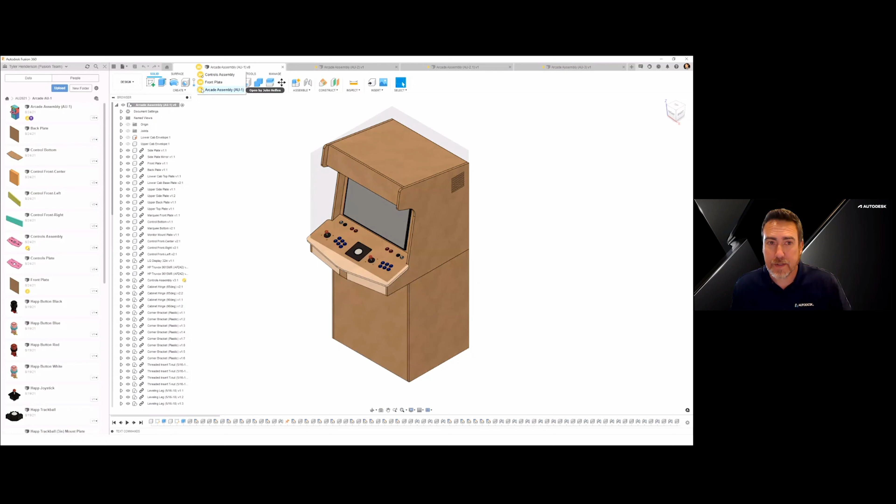So here I have an arcade assembly open. If we look up here in the document tab, I see John Helfen's avatar — the yellow avatar with his initials up here. If I mouse over this, I get a drop down that tells me exactly what he's working on. I see he has the controls assembly open, the front plate open, and the whole assembly open. As I mouse over each one, I can see them highlighted in the canvas, and if I click one, it's more highlighted and actually selected, so I can see closely where he's working in this assembly.

The other thing I see on this avatar on the controls assembly is a white dot. That white dot indicates that he has that design reserved, so it tells me he's actually editing that design. That's a good indication that I don't really want to be working in that same design or try to save anything — it's not going to let me save anything until he's actually done editing.

If we look over here in the browser, we show the avatars on anything that another team member has reserved. As I pointed out, John has the controls assembly reserved, that's why I see his avatar in the browser on that component. Reservation only happens on external components — John will talk about that in a minute — but I also wanted to point out the avatars appear in the data panel over here. I see John's avatar on the front plate, the controls assembly, and the arcade assembly.

So anybody else on the team can go open up Fusion, go to the data panel, and see who's working on what. They don't necessarily have to be in the same assembly or open up a design to see who's in there — they can just go to the data panel. You'll also be able to go look at that in Fusion Team.

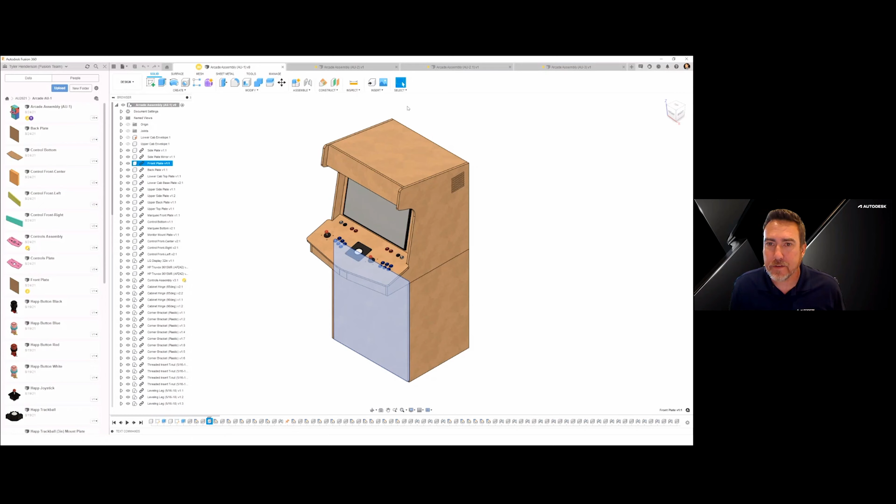Thanks, Tyler. Now that you've heard what the icons look like, I wanted to show what it looks like from my side. Just like you saw from his side at the title bar or in the document tab, I can see that he has this assembly open. And just like he saw, I can see that I have this controls assembly open as well. I've got it open in a different window that I'm editing, and this is the assembly I'm viewing. I also see the same information in the data panel.

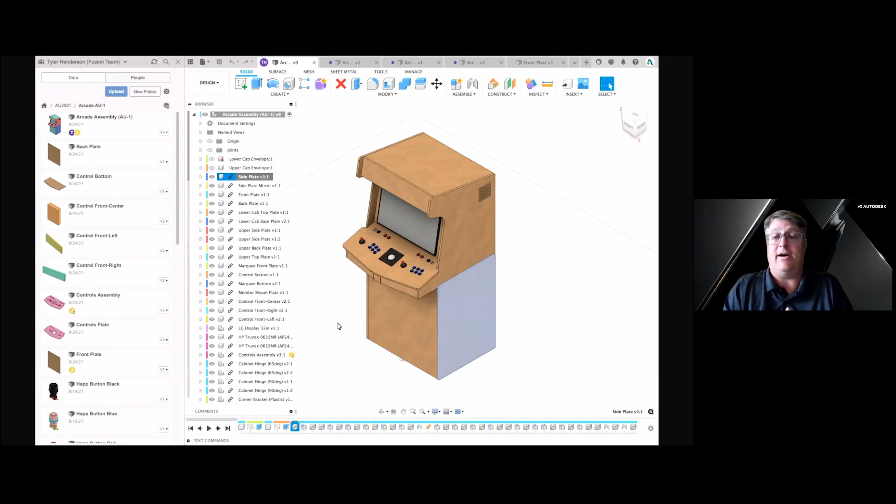As Tyler mentioned, it's important to know that a lot of the collaboration functionality we're talking about is specific to distributed designs or external files. In this assembly, we've chosen to use some internal and some external components. This is something you'll need to discuss as you prepare for team-driven collaboration, deciding who's going to be working on what. Based on that, you'll decide whether components need to be internal or external. If you don't know, it's often better to start with an external file, since it's easy to make it internal. On any external file, right click and select break link and it will make it internal. If you've got an internal file and need to get it out of the assembly, you can use the derive functionality. Let's take a look at where those show up here.

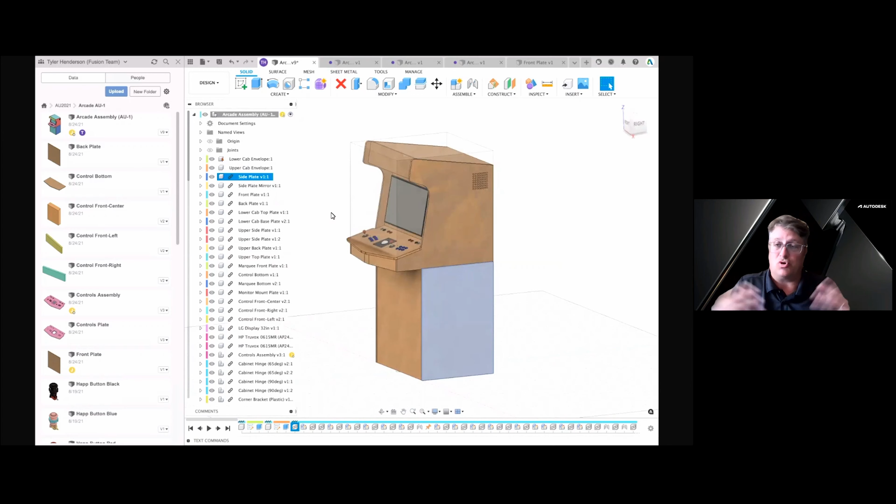You see the external files here in the browser, represented by the link icon. Just above that, we have a couple of internal components that we've created. These are really just design tools, envelopes that we're using to control the size and shape of the assembly. Nobody really needs to collaborate on those, so we kept those internal just for speed and efficiency.

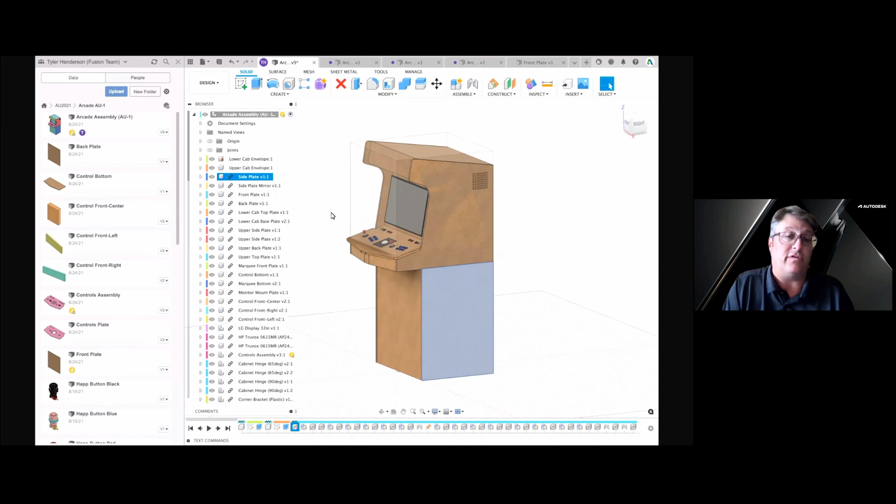But all of the other components we know we might use in other assemblies, and we may separate and have specific team members detailing them out, so we chose to make those external. It's important to know that you may have situations where you create an external file to distribute information, but even within that external file use internal components for flexibility in different scenarios. So it's important to know the difference and consider them at the beginning of a design process.

We mentioned edit in place earlier relative to external components. One of the benefits of external components is the ability to edit them in the context of the assembly. Of course, you can do that with internal components too, but external components provide the ability to collaborate in an assembly. So when you have external components in an assembly, you can edit them in the context of the assembly without having to open them in their own tab.

To edit in place, you simply right click on the component you want to edit and choose edit in place from the menu, or hover over one of the components and use the fly-out pencil button that appears and click on it. This puts you into edit in place mode, indicated by a blue border around the screen, and a toolbar appears at the top of the canvas telling you that you're in edit in place.

Now you have two options when you go into edit in place: associative or non-associative. Non-associative is basically like opening up that component in its own tab and doing the edit, except you can still see all the surrounding components from the assembly. You just can't reference any of them, select them for references, or anything like that. You're just focused on editing that one component.

If you do associative edit in place, that lets you select other geometry in the assembly, other components, sketches, faces, anything in that assembly that's in other components. You can select them for referencing, so you could do sketches in the component you're editing and project geometry from other components. When you do that, it creates an associative reference, and we capture those references in assembly contexts, which we'll discuss in the next section.

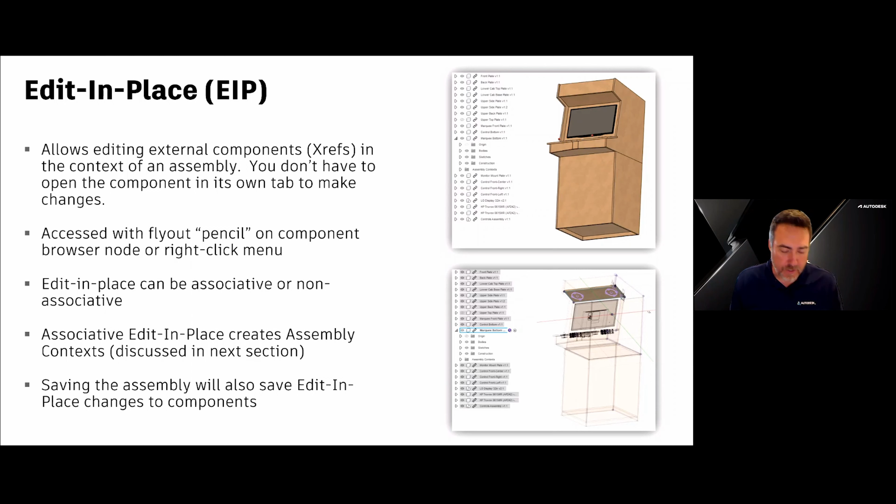So we're going to switch back over to Fusion 360 and show what edit in place looks like there. All right, so I have another version of the arcade assembly here, and what I want to do is put some speaker holes in this bottom marquee.

So you can see I have the speakers already in this assembly. They're external components in here, and they've been inserted. And I actually want to use the geometry from those speakers to create the holes in that bottom plate.

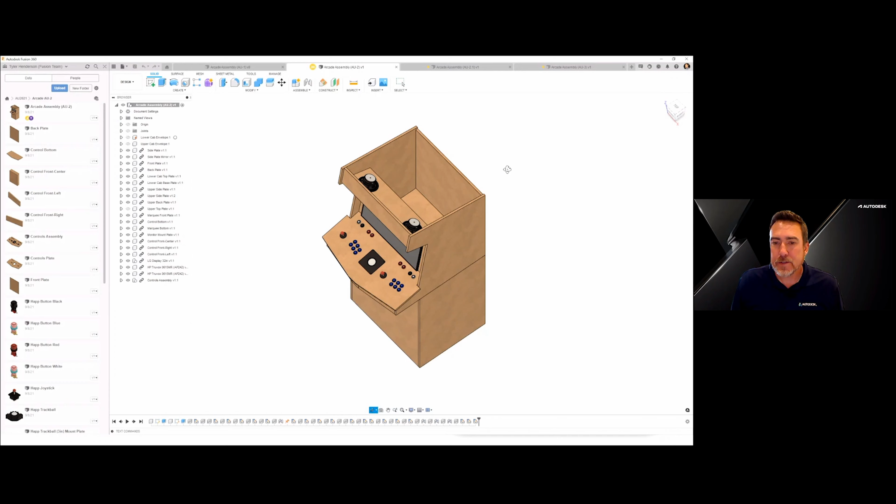So I'm going to go ahead and start edit in place on that bottom marquee. Just click the pencil button here. It puts me into edit in place mode. It tells me what component I'm editing. And when I start creating references, it'll actually create a context. So you'll see that happen here in a second.

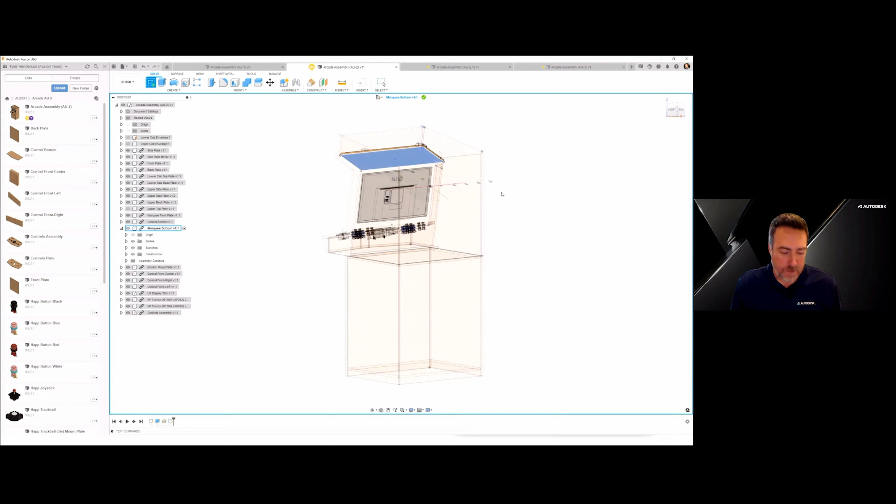So I'm just going to do a sketch, and then I'm going to project geometry from these speakers. I want to just grab the outside of these speakers so I can get the proper size hole. This is a nice way to do this because I don't have to guess the hole size or measure it and draw it manually. I just project it from those speakers, and then I have the information I need.

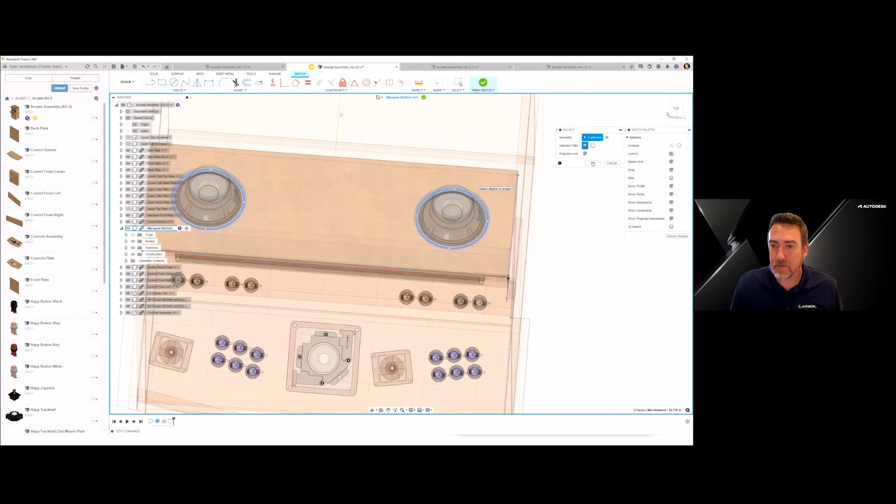Now, one of the cool things about this, as we talked about, is collaboration. So while I'm actually working on this bottom marquee plate, John can be working on another part of the assembly and doing edit in place on components there. So we're going to switch back over to John's computer and see what he's doing.

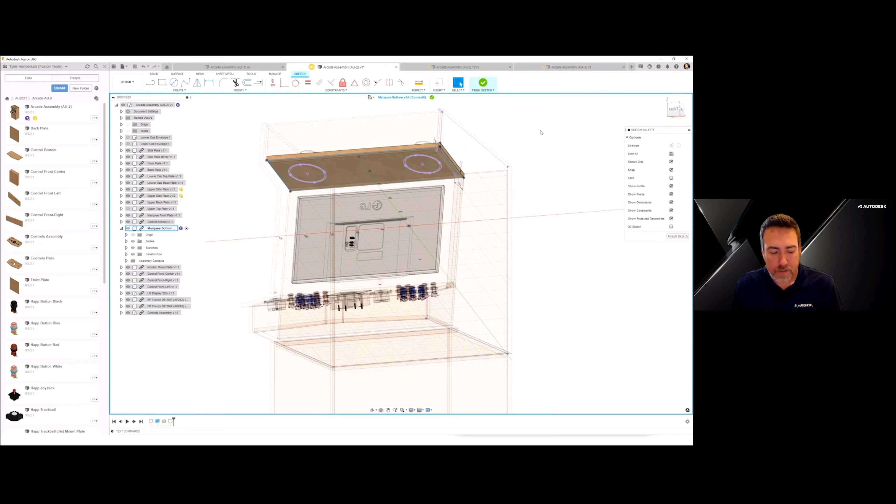All right, thanks, Tyler. As Tyler mentioned, just because he was editing the assembly doesn't mean that I needed to stop. This is often in traditional design environments where the stopping happens. This is where we might run into a situation where I have changes that I've made to something, and Tyler has made changes as well. Often those are the cases where it's whoever saves last wins. If I save my work and then Tyler saves, he stomps on me, and the reverse is true as well. And that's not the case here.

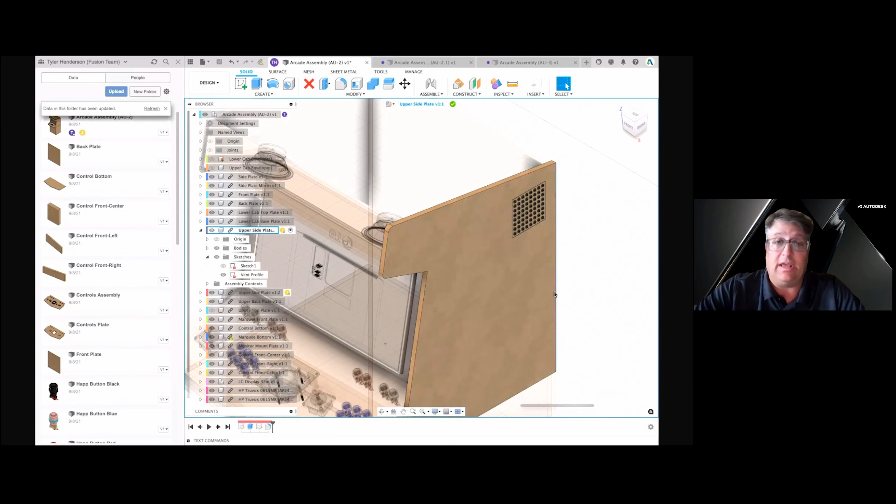As Tyler started editing the assembly, I saw that the collaboration icons let me know that he was changing things, or that he had things open, and that he was changing them actively. And that didn't prevent me from opening the assembly, getting into this design and doing some work. While Tyler was working on getting those contexts set up for reference on adding the speakers, I was adding some fillets. I was using my basic modeling commands to do general updates.

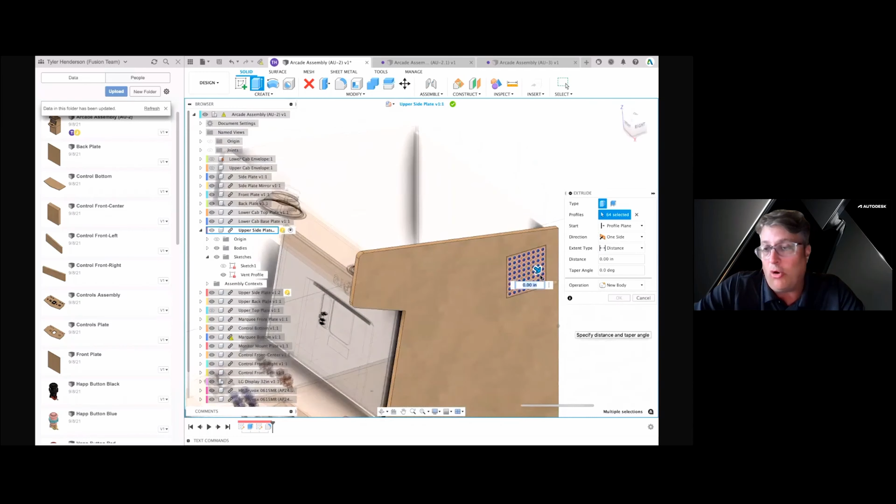Now, what's important here is because Tyler was working on the assembly, I'm making what are known as non-associative edits. This is really like me opening the file in its own window and making edits and changing it. Once I come out of this and I save this, Tyler would be notified that a change happened, and he would be able to bring that information into his assembly.

But what's important is when I came in here, I knew Tyler was in the assembly. And if I just saved this and moved on, it wouldn't be any different than what you would be used to in a traditional environment. But what's important here is that Tyler has clearly made changes.

You notice when I came out of edit in place, I have a new icon here in the root of the browser and here on the top toolbar as well. That's telling me that Tyler's made changes. And I knew that going in because I had seen his reservation on the feature. So I knew to expect changes coming from him. And that's what we're going to do here.

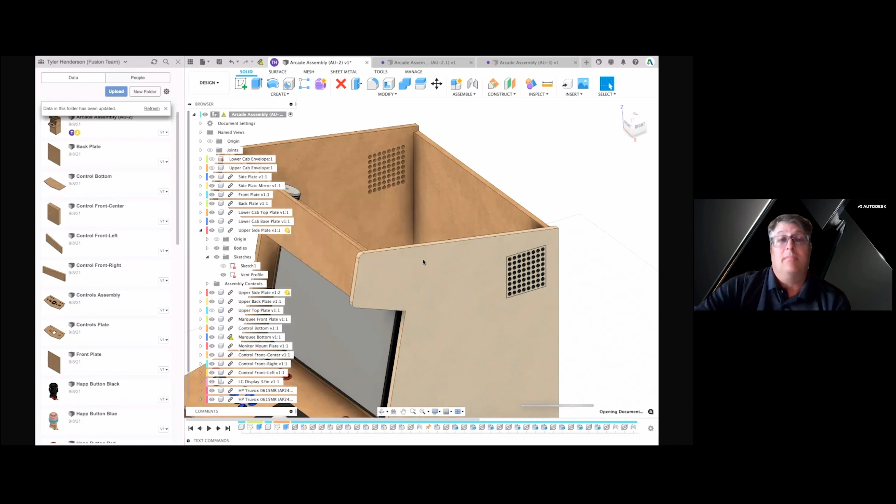So all I have to do to get Tyler's information is I can go ahead and say get latest. By doing that, Fusion sends the changes that Tyler has made to me while I have changes in memory. What's important is now I can see the changes that Tyler has made, and I can also see the changes I've made. I've rounded these corners, I've enabled some venting, and now I can see both the changes for all of the assembly components that we need.

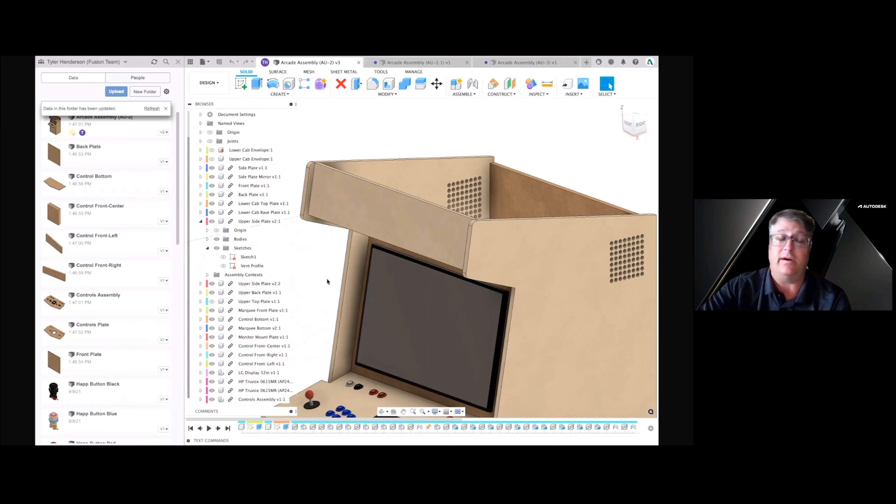And now I have the ability to save those changes. By doing that, I'm capturing both the assembly that contains Tyler's changes and the upper side plate that contains mine. So essentially, we avoid the need to stomp on each other, or eliminate the chance that we do that, and we have an opportunity to have all the correct information.

All right, thanks, John. So now we're going to take a look at assembly context. John's going to introduce assembly context that gets created when you do associative edit in place.

Thanks, Tyler. As Tyler mentioned in the previous section when we were working on edit in place, you saw Tyler creating context. The difference to how he's doing it and what you'll see as we move forward was he was just doing standard modeling operations. What's important here is context make an associative connection between an assembly and an external file during the edit in place process.

And it's important because in the assembly, when we make these references, you have the ability to distribute information—positions of things, geometry, construction information, references from the assembly into the external file. The reason for that is most people don't want to be in the main assembly. You want to have this distribution of information, but focus on the things that are important to you, and context provides that capability.

What this does is when Tyler was projecting the information from speakers in the assembly, those contexts were being created automatically. Then when he opens that assembly or that component on its own in its own window, those contexts can be activated, and he has access to what he needs from the assembly without having to have the entire assembly open. The nice thing is these links are associative.

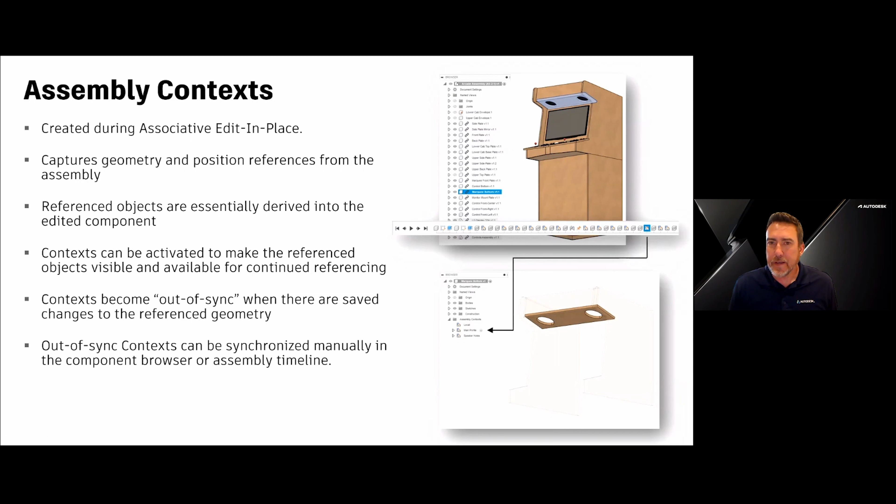As you can see, I have a version of the assembly open here that has the holes in the marquee bottom plate. I created those holes using edit in place, and when I did that, it created an assembly context. Over here in the browser, I expanded the marquee bottom, and I show the assembly context here—here's the speaker holes context that was created when I projected the geometry from those speakers. If I click on that, down here in the assembly timeline we have a representation of that context as well.

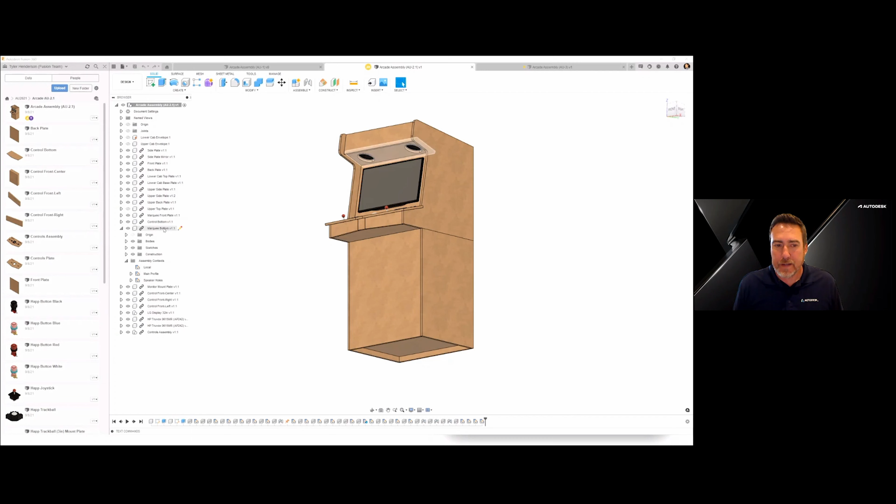So I want to show you what this looks like when I open up this component in its own tab. Here's that marquee bottom in its own tab, and again I have the assembly context, the same ones that you saw in the assembly. I can go ahead and activate one of those.

When I do that, you actually see the geometry of the components that I projected—it's actually projecting the bodies that I selected. If I expand this a bit further, you can see those two bodies here. So it doesn't bring in the entire component; it just pulls in the bodies of the entities that I projected.

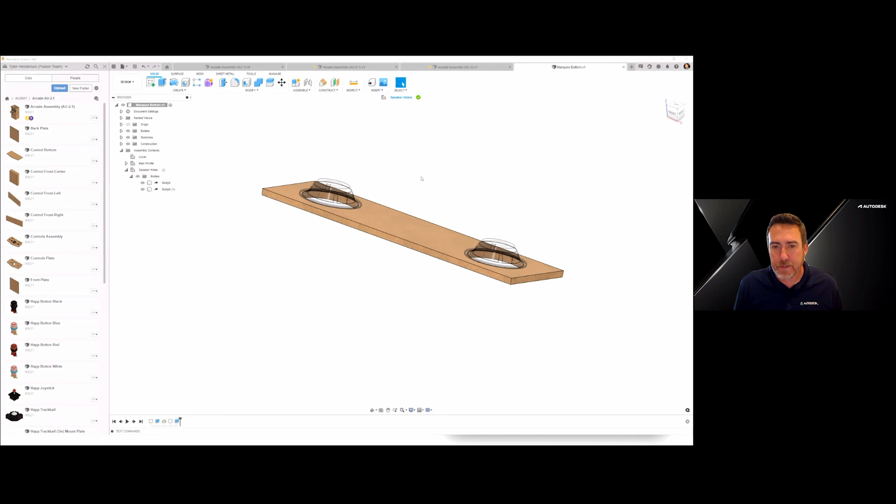Now here's the really cool thing: I can continue using this context to make more edits, and I need to put some mounting holes in this plate for these speakers. So I'm going to go ahead and do another sketch, and I'm going to project those holes.

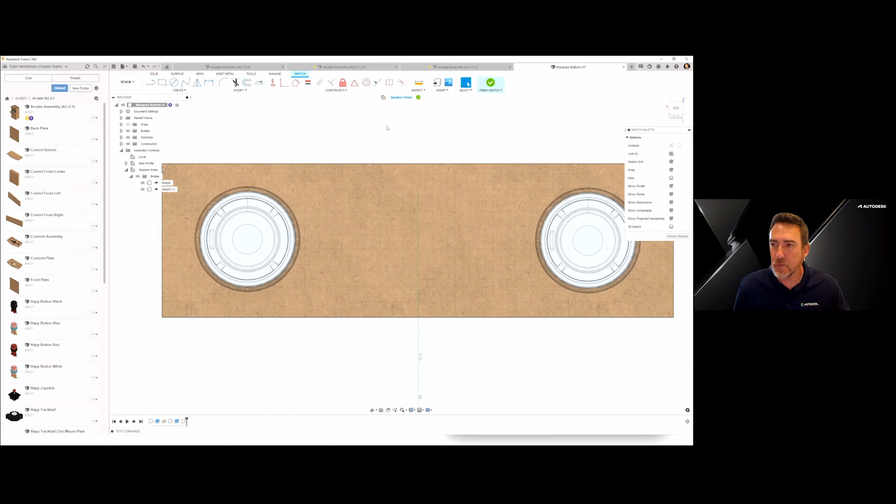Now, while I'm doing that, John can still be working in the assembly. So even though I've got this part open in its own tab with those references from the assembly, John can be working in the assembly and making other changes. We're going to switch over to John's screen and see what he sees.

Thanks, Tyler. As Tyler said, he's going to continue on with his work, just as you saw him moving about his business, and I'm going to do the same. While he's editing, as you can see here in the browser, I can see that he's editing the marquee bottom. I also know he's only editing it on its own because he's not in this assembly, and it doesn't have any reservations there. So that's where we want to be.

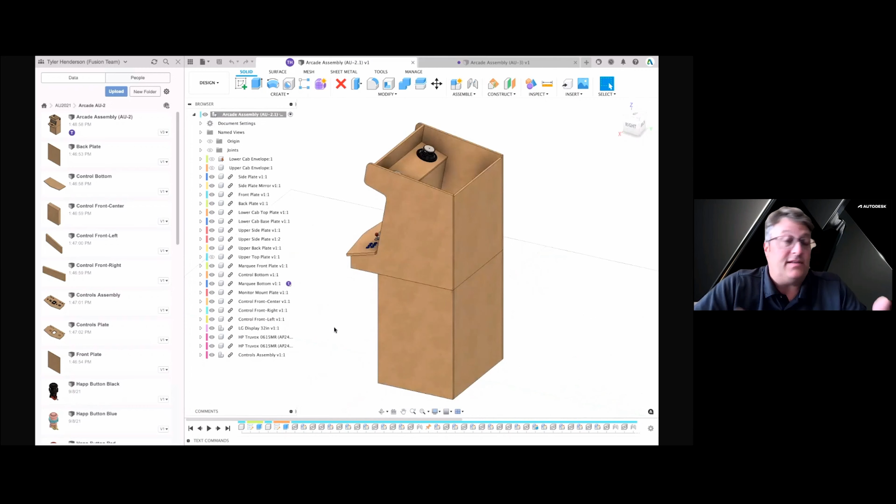My job was to work on some of the stuff on the side panel. I know we're going to be making some changes to this marquee as well—we're going to add some new lighting capabilities in it. So what I'm going to do is from the assembly side, I have the ability to make those changes here.

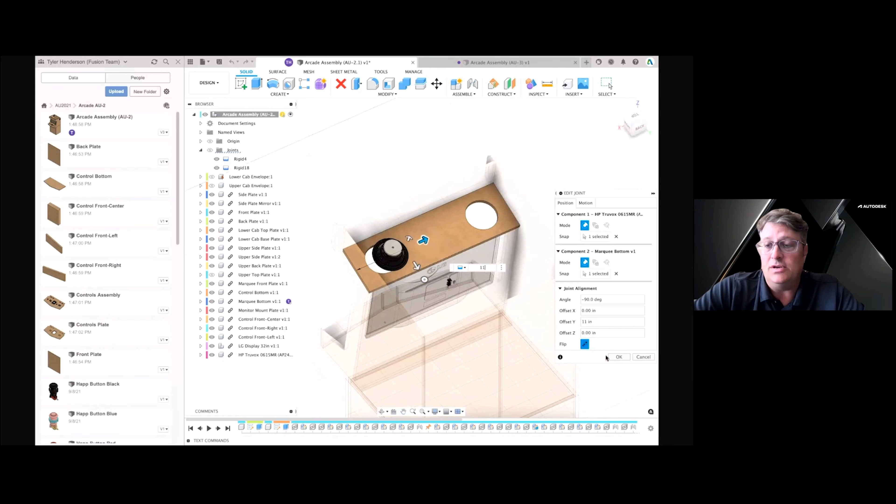For example, I can say these speakers need to be adjusted—maybe they need to be moved in just a hair on each side to make some room for some new lights. I can be editing those positions in the assembly, and Tyler is continuing about his business, working in his daily work, isolated on his own, not in this assembly. But he still has access to everything that's important to him.

And those are ways that you could bring that information in. Tyler's going to see the same. Once I save these changes, he will end up getting a notification that the context has gone out of date, and we can trade information back and forth. But really, my working in the assembly wasn't interrupting him.

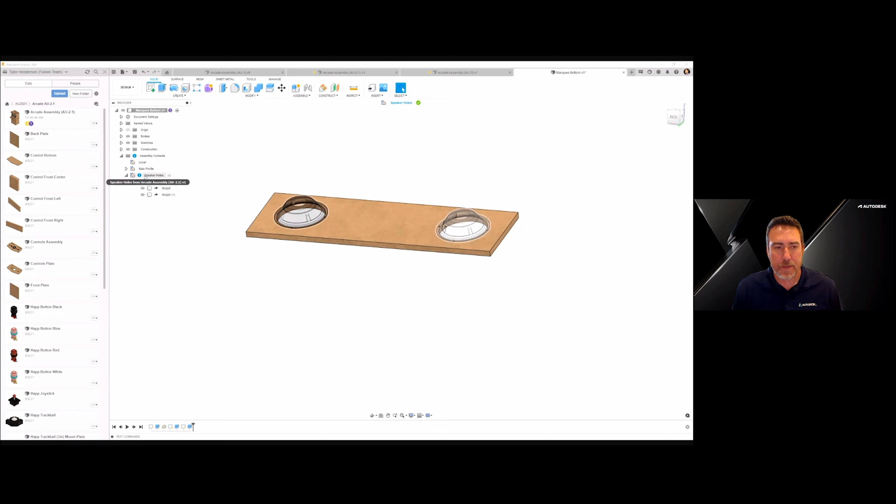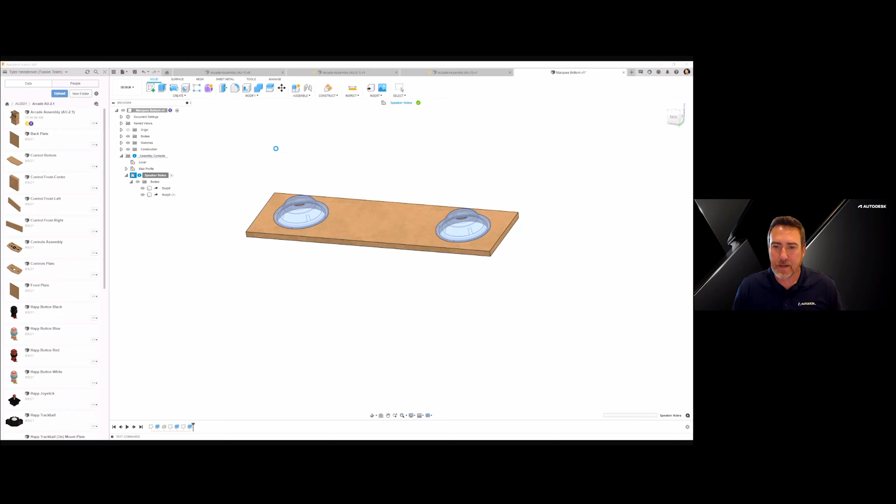Thanks, John. Let's take a look at what I have on my screen. As you can see, the speaker holes context I have here is out of sync, because John made a change in the assembly that affected the geometry referenced in this context. So I can go ahead and update or synchronize this context. When I do that, you should see the speakers actually move, because that context captured not just the geometry but the position of those speakers in the assembly. So when they move, the features I created that reference those speakers also move. This is a great way to keep things synchronized between a component and an assembly.

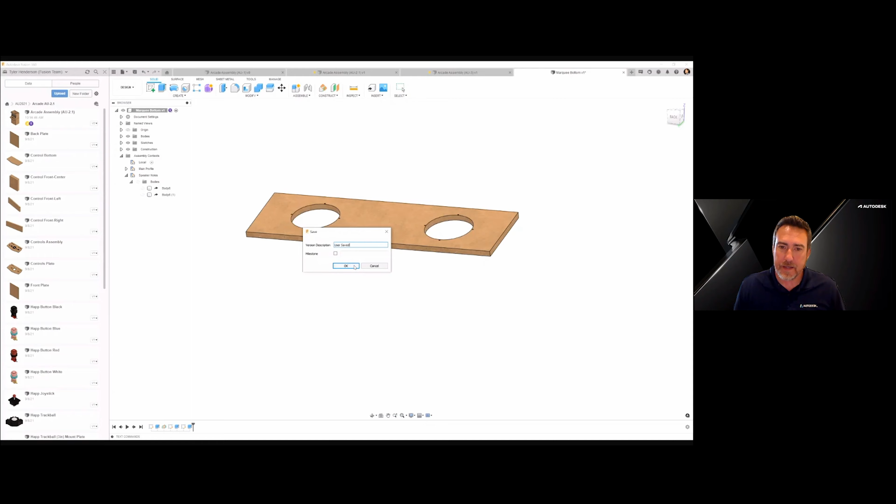Now, when I go ahead and save my changes, John will see the update in his assembly, and we're going to switch over and see what he sees.

Thanks, Tyler. Here, as we switch back to my screen, you can see Tyler's made a change. He saved something and I get notified. I can see here in my browser that the marquee needs updating. The root gives me information that something in this assembly needs updating, and I get the notification on the toolbar as well. So all I need to do is pull that new information in from Tyler.

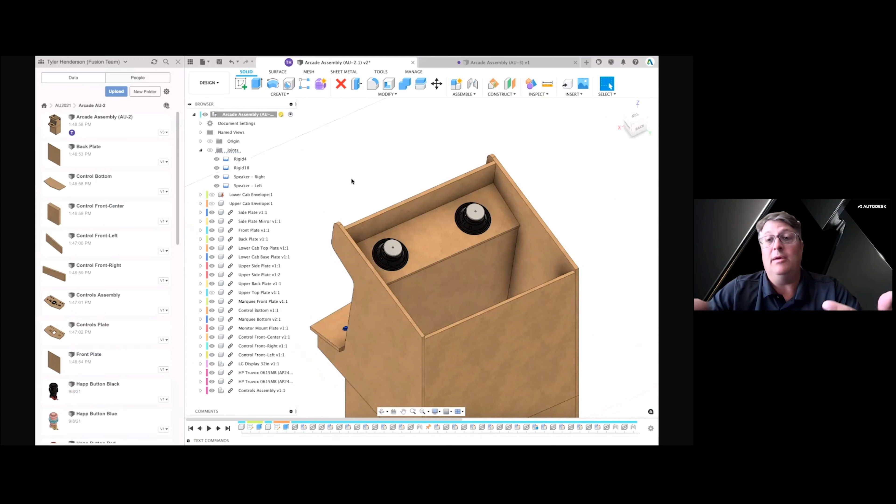He's made a save. I saw he was editing it. By pulling in the updates, you can see the holes for the speakers have moved. And while I was explaining this to you, Tyler finished his work and added those mounting holes, which are now available to me in the assembly as well. So there you can see Tyler and I working together at the assembly level and in the individual components, passing information back and forth through that context.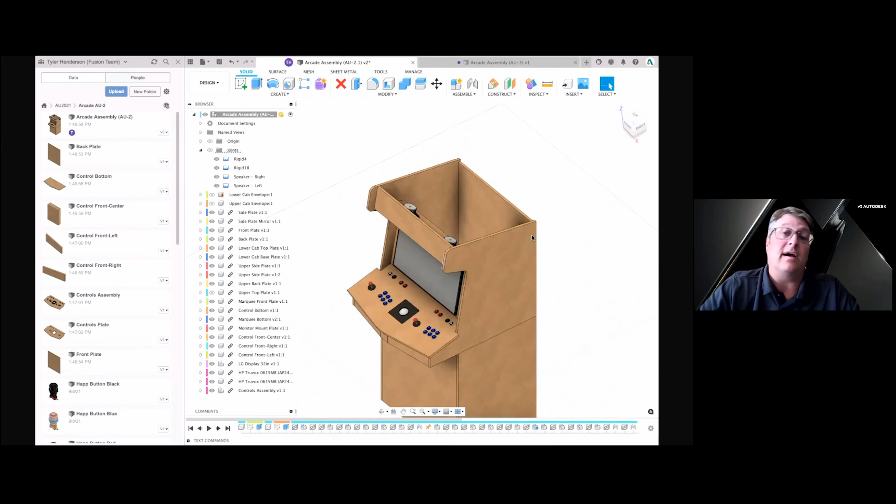All right, that was great stuff, John.

So now we're going to switch over and talk about reference objects. We just showed you a bunch of different tools to assist you in collaboration: the ability to see where other people are working in the assembly, to edit things in the context of the assembly, and to capture references when doing edits in the assembly. But we know you don't always want to be working in the assembly. We know that when you have a bunch of team members, you don't want everybody working in the assembly at the same time necessarily, but you still need other people detailing components from that assembly, capturing references to define the shape, size, or location and position of those components. That's really where reference objects come in.

So when I did edit in place, I did features while doing that edit in place, and it implicitly created references to that assembly. But reference objects allow you to explicitly create references. When you're in edit in place, you can use the drop-down menu in the edit in place toolbar to choose reference objects. That pops up a command where you can choose objects to reference without having to do any features or real editing on that component. This is a great way to set up an assembly, create components, and have other people detail them outside of the assembly while still having that reference information from the assembly.

So we're going to switch over to Fusion 360, and John's going to demonstrate this.

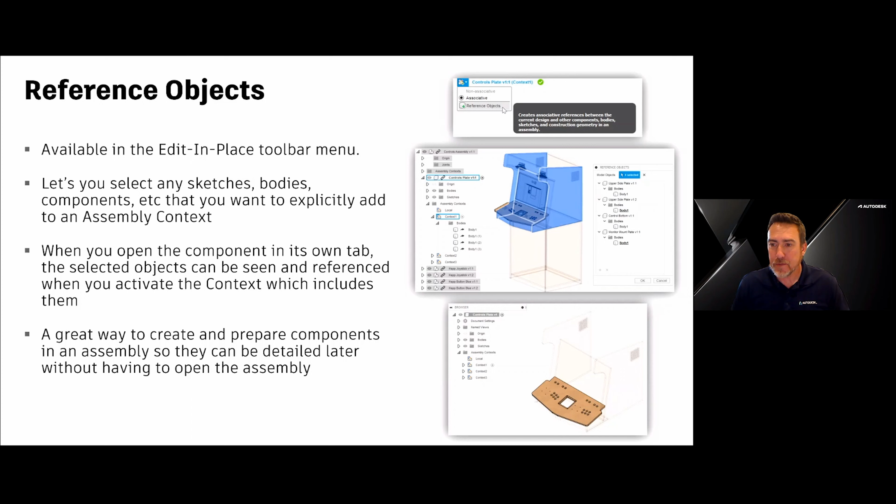Thanks, Tyler. As Tyler mentioned, the setup process is where you're going to leverage reference objects most frequently, is our estimation. As a project leader on a project like this, you're typically going to sit down and discuss how the assembly is broken down and who's going to be working on what. There's typically somebody assigned as project lead. This is one of those places where we see efficiency happening: I'm playing the role of project lead, and I see we've got parts of this cabinet started. I know Tyler is going to be detailing out and working on some of the control panel assembly. We talked about internal and external components earlier, and now we're going to actually create a few and look at how we can use reference objects to prepare a design for Tyler to start working on while I'm working in the assembly. So to do that, I'm going to go ahead and begin by creating a new component.

When I do that, I have an option for internal components or external components, and an option to pick where I'm going to save this. For example, I'll save in our AU3 folder. It tells you what parent object the object will be created in, and finally asks whether you want to activate that component after you've created it.

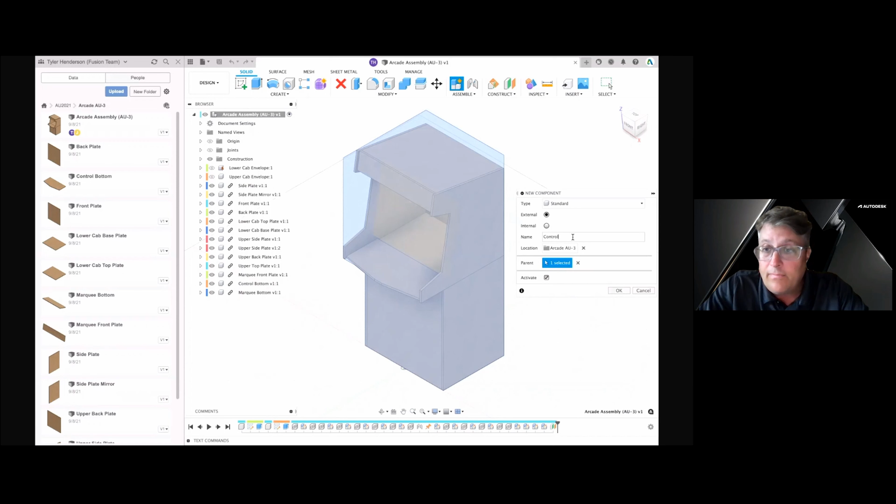So I'm going to begin by creating a controls assembly. I've left it external and set it to be activated. So when I begin, I'm able to create that external component. I'm active in that component, and I can continue.

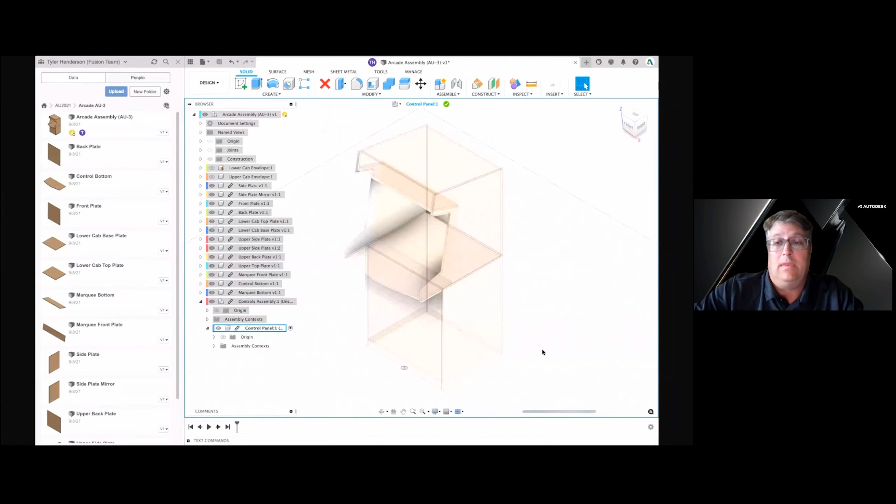To do that, I'm going to create one more component. I'll leave it external, and this time create the control panel. I'll leave everything as active and move forward. Now, as you can see, I'm in the control panel, I'm active in it, and I can continue working.

Now I'm ready to start adding new information using reference objects. I know Tyler is going to need a few components from the assembly to detail out and build the control panel. So now that I'm in edit in place—you can tell from the blue outline on my screen and the in-canvas toolbar—this is where the reference objects command is located.

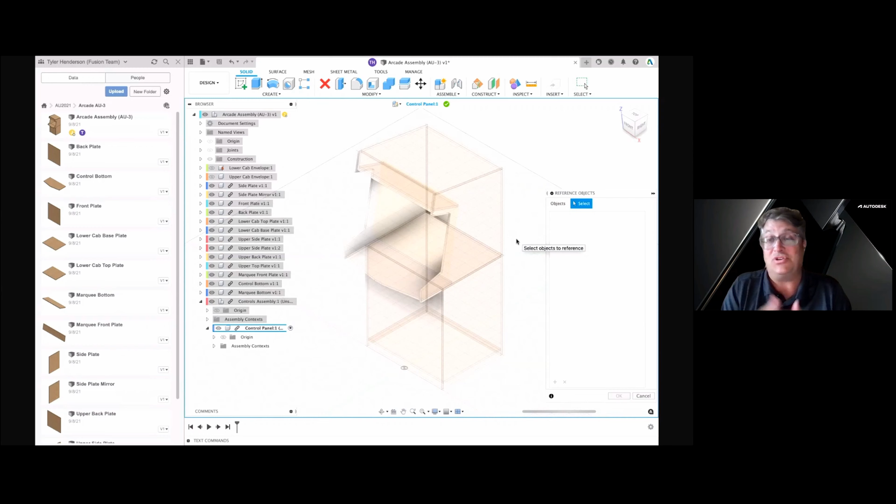Here I can select the reference objects command, which brings up a dialog box. If you've used Derive in the past, this should look very familiar. If you haven't used Derive and later go learn about it, this will look familiar then too. We tried to make these very similar, and the technology underneath uses the Derive technology when contexts are created.

So with this dialog box open, I have a couple of different options. I can start very quickly by just left clicking on geometry that I need in the graphics window. By doing that, you can see the dialog box gets populated, and I'm getting the bodies that I selected in the window.

The other option is to select entire components from the browser. If I select the marquee bottom and look at what I get here, by selecting from the component in the browser I actually get more information—things like the origin, the bodies, the sketches, and the construction geometry. So you have a couple different ways to select geometry to get very specific information you need. In this case I don't need that; I just wanted to show how a component was selected.

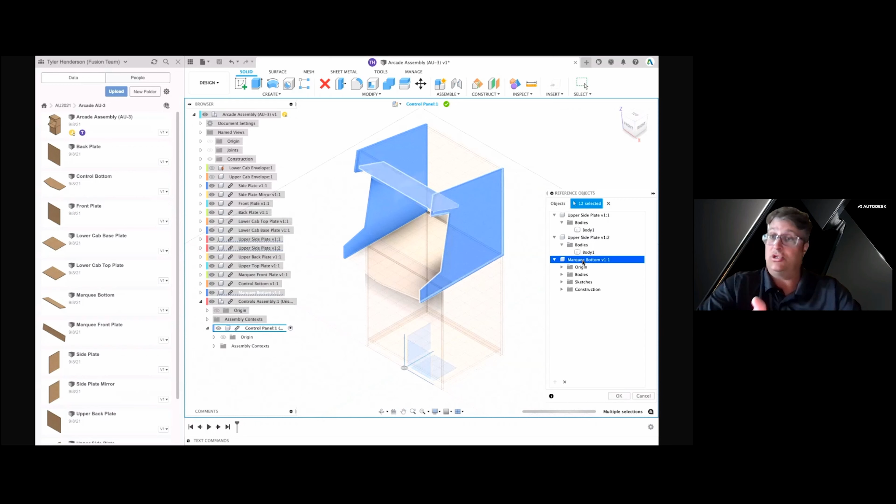It's very easy to edit this list as well. I can select an item and remove it. What's important is you can always come back and adjust this. If you're moving along and realize Tyler is missing a component, we can always come back, edit this, and pass that information out.

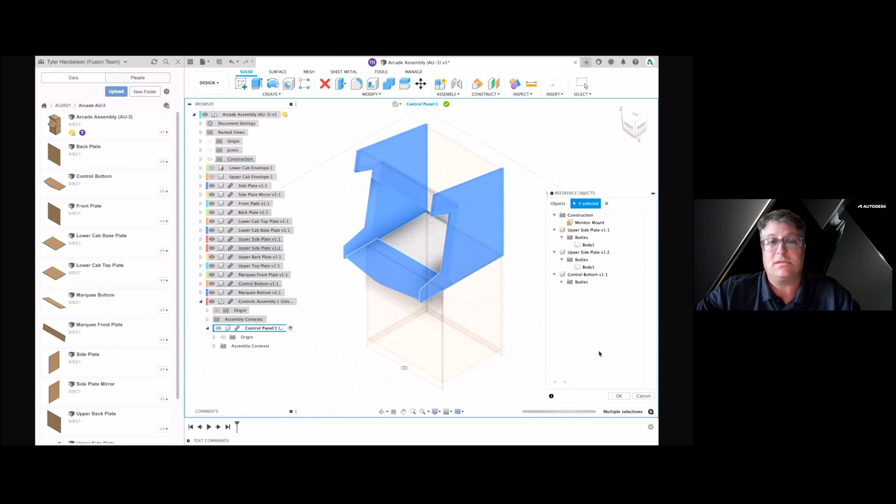Here I'll go ahead and continue with the last couple of pieces. I'm going to select that bottom plate, and there's a construction reference I want to pull in as well. You can see it's all represented here in the dialog box. So now all I have to do is hit OK, and you can see in the browser that we now have a context created, with the bodies that were projected and the construction information that was selected available.

So now all I have to do is come out of edit in place and save those changes. You can see in the save dialog box that I'm going to save the assembly and then each of the components I created. By doing that, I'm creating the information Tyler needs so he can get started—I've dropped in what he needs from the assembly. So I can continue about my business, but we'll switch over and let you see how Tyler's going to interact with things from here.

Thanks, John. So as you can see, I have the same assembly open that John was working on. If we look over here in the data panel, we see a couple of new components that were saved—this is the control assembly and the controls panel that John just created and saved. So we're going to go ahead and open up that controls panel.

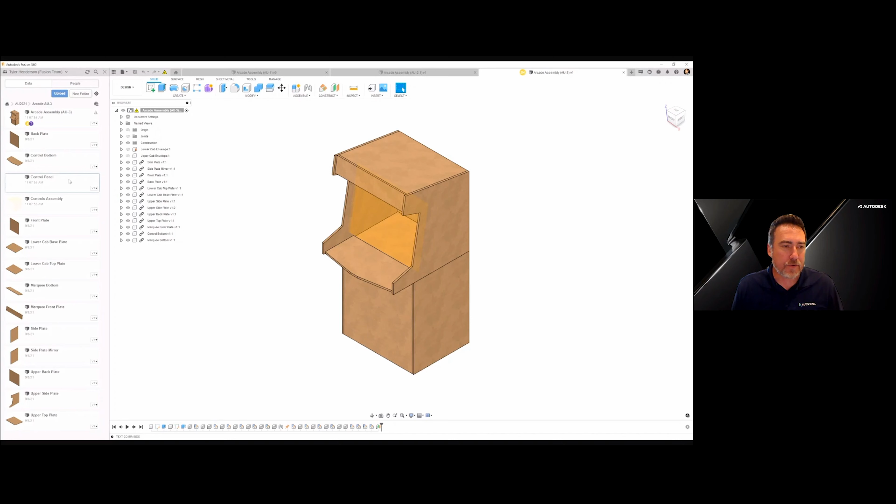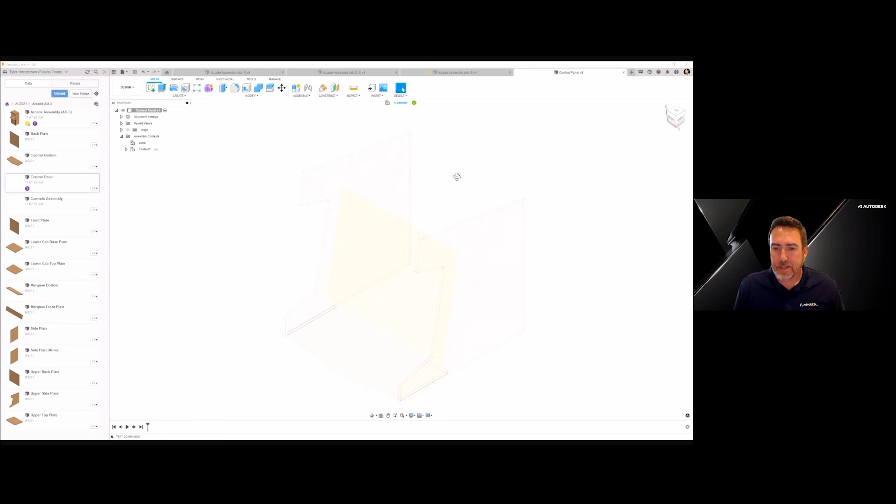To start, there's no geometry because John didn't do any detailing in that design, but he did give me some reference geometry. So I see over here in the assembly context that John created, and all of the things John selected using reference objects are added into this component for me to reference.

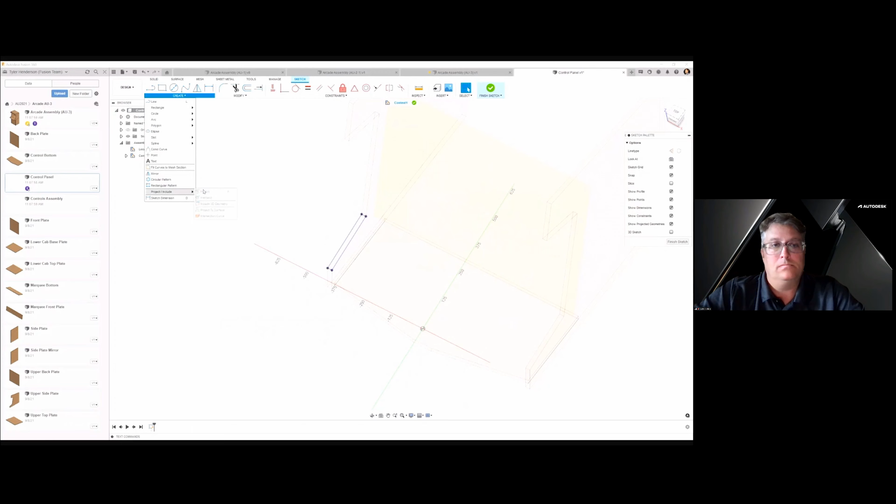So I'm going to start detailing that controls panel. I'm just going to do a sketch here on some of the geometry that was derived using context, and I'm going to use that work plane that John brought in for me. And just start doing a profile of this so John can take a look at what we have after I create this.

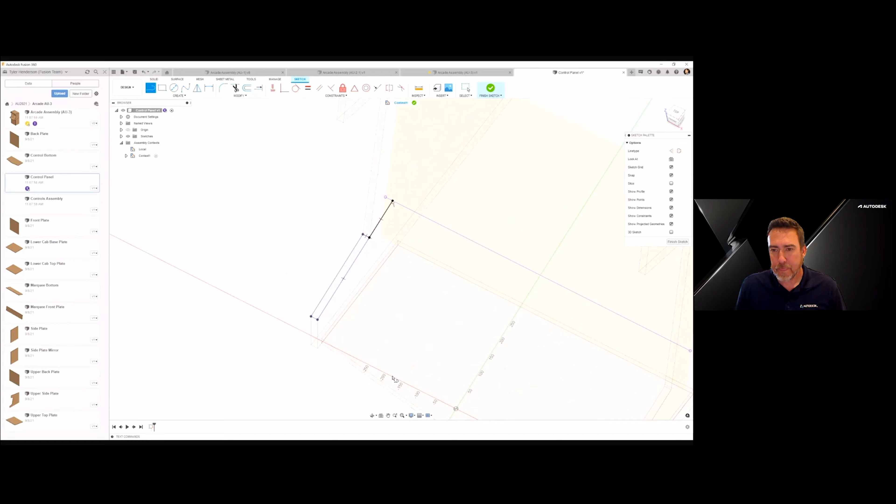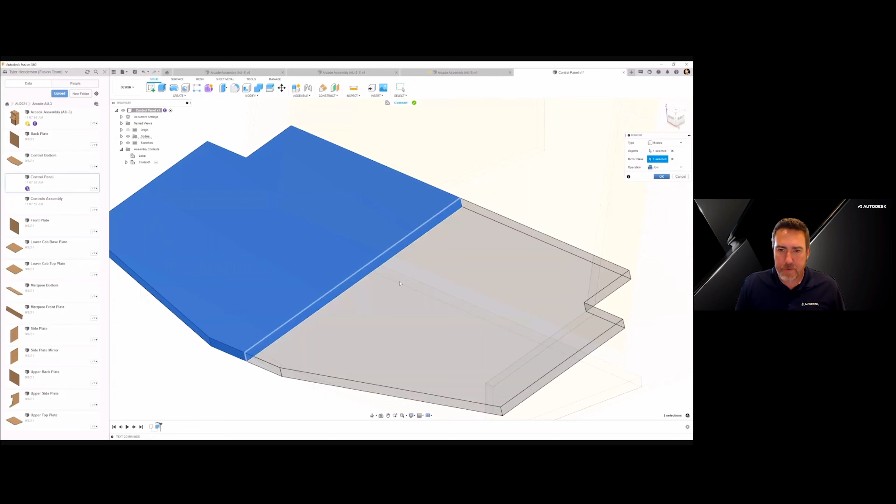All right, I'm going to go ahead and extrude that. And now I'm going to go ahead and mirror that. So we have the basics of the control panel plate that I used based on the reference geometry. I'm going to go ahead and save.

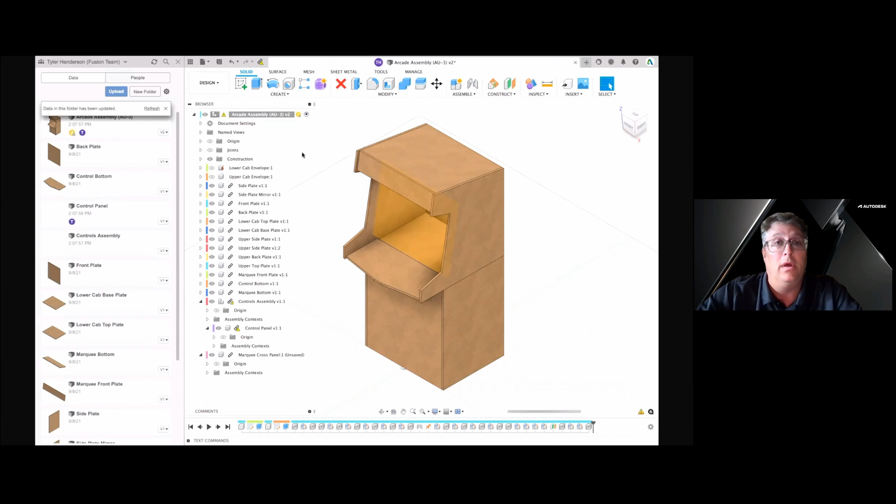And then we're going to switch back over to John's screen and see what he sees. Thanks, Tyler. As you saw Tyler working there detailing out his control panel, I continued on. I created a new cross panel that we're going to need in a little bit, and it's unsaved currently. While I was doing that, I see Tyler's made a save, and I have some new information I can pull in. So all I'm going to do here is pull in the updated geometry and continue on my way. What I see here is now I've updated the controls assembly because I pulled in Tyler's new information.

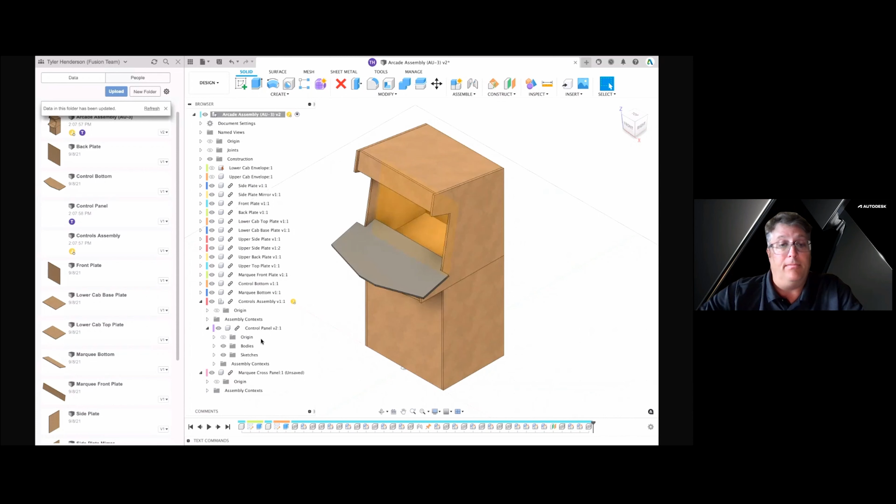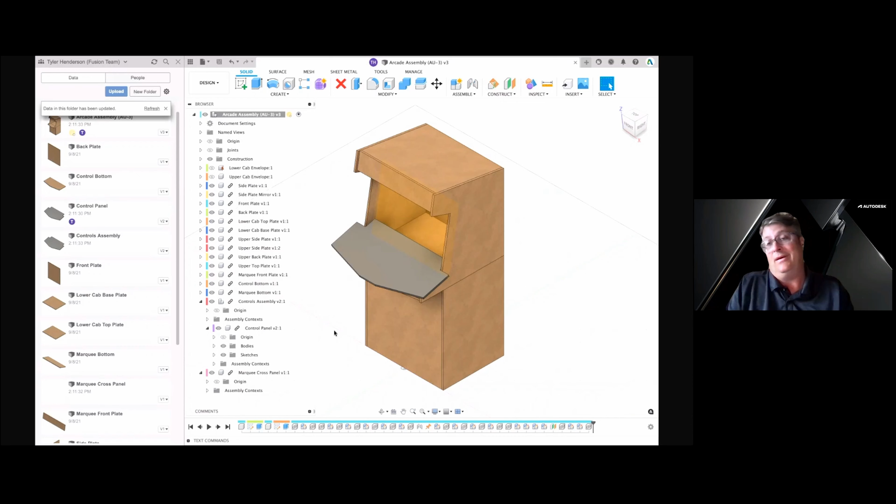So I've edited that, and I was already working on the assembly, so I have that reserved as well. Now I have the opportunity to just simply save, and you can see I'm able to save the new component that I created. I'm also updating the assembly and the controls assembly as well. Just by pulling in that information, because of the contexts and positions that were transferred, Tyler was essentially building that component in place in the assembly, even if he wasn't in the assembly at the time, because he used those contexts. So when I brought that information in, his geometry is right where it belongs, saving us time.

That's awesome, John. This is so cool. So that's pretty much it. Let's do a quick wrap up of what we talked about here.

We talked about avatars, which let you see who's working on what. It's basically your other team members' presence in files that you're working on or other files in the project. We talked about implicit reservation that lets you reserve a part that you're actually working on or editing, and it prevents other people from stomping on your changes when you're working on it. They can open it up and do all kinds of things in there, but they won't be able to save while you have it reserved. Once you are finished with your changes and saved, the reservation goes away.

We talked about edit in place, which allows you to edit external components in the context of an assembly without having to open them up in their own tab, and it allows multiple people to edit components at the same time in the same assembly. We talked about assembly context, which are associative references that get captured automatically when you do edit in place. And we talked about reference objects that let you explicitly grab references from an assembly without having to do modeling in the assembly, so other people can do downstream detailing of those components and still have that reference geometry from the assembly.

So all of these things put together really help more people work together in Fusion 360 at the same time. You don't have to be waiting for someone to finish their work before starting your own. You can do real-time collaboration, be much more efficient, get people working together without losing your work, and create a whole ecosystem of collaboration using Fusion 360 now.

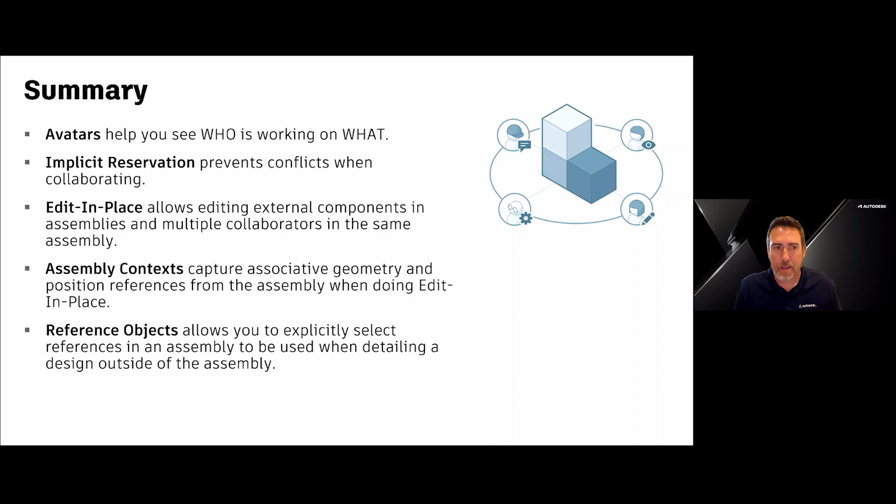So that's pretty much it for our class. We really appreciate you attending this class. We hope you learned a lot of valuable lessons, and we hope you'll be able to use these tools and skills to be more efficient and start collaborating with your team members on assemblies.